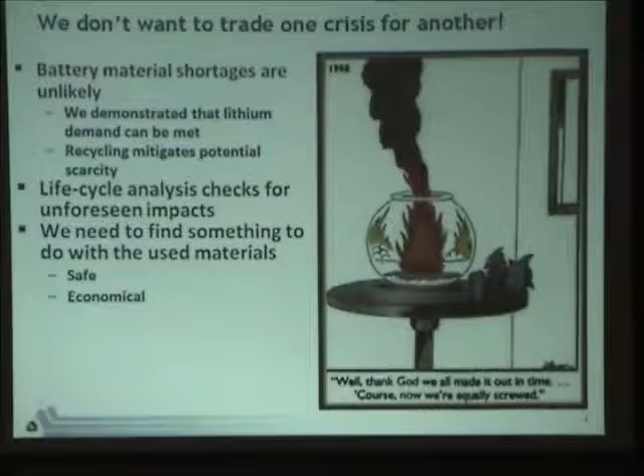That quickly led to the conclusion that recycling would help mitigate any potential shortages. We have also been doing life cycle analysis of the batteries to make sure that there weren't any significant environmental impacts that were going to crop up. And finally, we have been looking at the recycling technologies from the standpoint of making sure they're safe and environmentally sound, and also to see which ones are most economical, so that once we figure out what the technology is, some business would actually be willing to do it.

So to look at the material supply issues, we just answered a set of questions. How many vehicles are there likely to be? How many of them are likely to be electric? Are they likely to be plug-ins or pure electrics? How much lithium would that mean we needed each year? And how much difference would recycling make if you could get the material back? And then we wanted to see whether there were constraints on supplies of any of the materials.

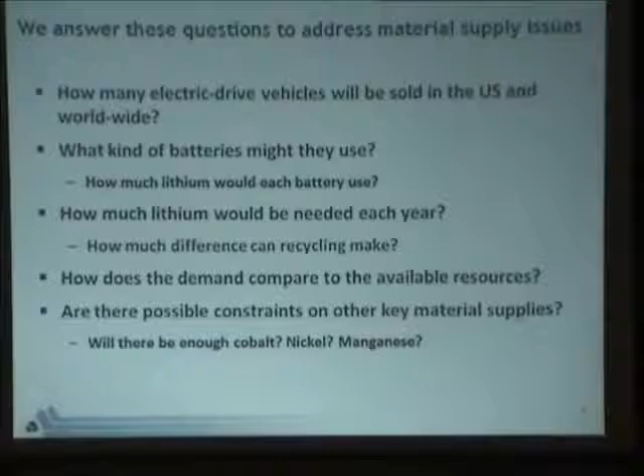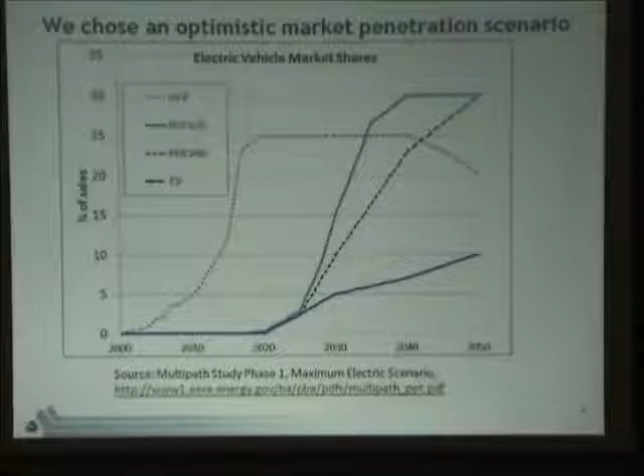I'm going to go through that extremely quickly because I know the focus is supposed to be on life cycle analysis for this. So we used a market penetration scenario for electric vehicles that was developed for the Department of Energy. This was their maximum electric scenario, and you can see that by 2050, approximately 90% of the vehicles would have some form of electric drive. And that's an extremely aggressive market penetration assumption. But keep in mind, it's a scenario and assumption.

There were also other scenarios. One was a maximum penetration of fuel cells. Another was a business as usual. So this is not necessarily meant to be realistic. It's how much lithium could we possibly imagine that we'd use.

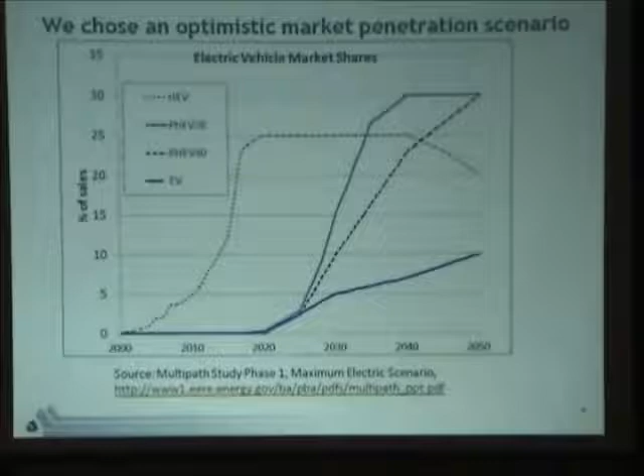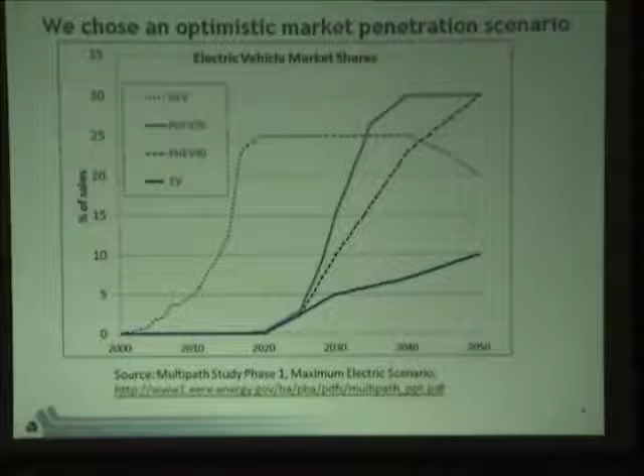What are those different? The dark blue one is plug-in hybrids with a 20-mile all-electric range. The dark dotted one is plug-in hybrids with a 40-mile all-electric range. So that would be equivalent to a Chevy Volt. The light dotted one is just straight hybrids, which are essentially assumed to plateau and then kind of dissipate. From the standpoint of lithium demand, they're the ones that wouldn't use much lithium anyway. And then the solid purple line is pure electrics.

So we actually, in collaboration with the Chemical Sciences and Engineering Division at Argonne, designed a set of batteries for these vehicles and looked at 4 different chemistries shown on this slide. They all have lithium in the cathode. The titanate also has lithium in the anode, and there's also some lithium in the electrolyte for all of them.

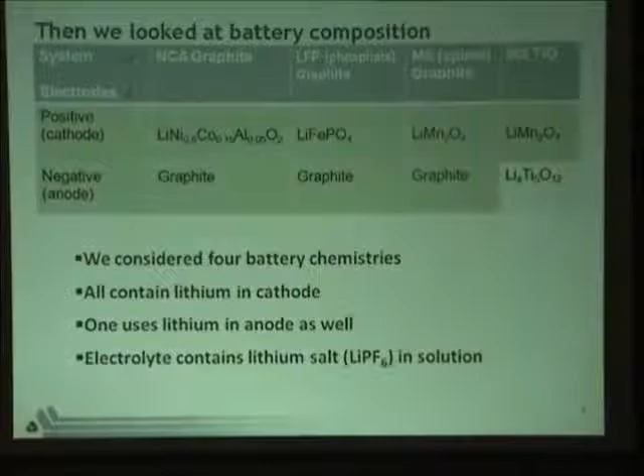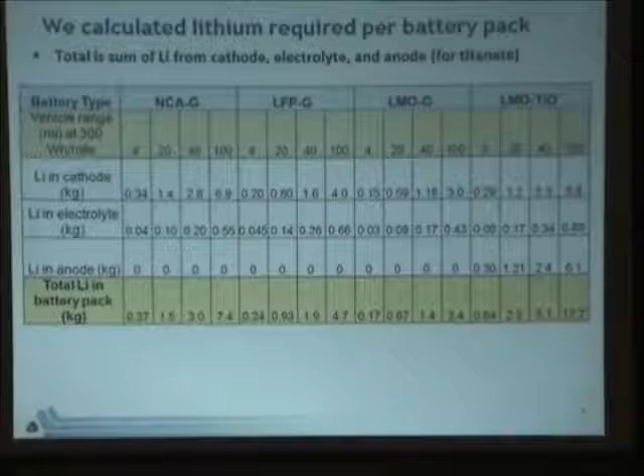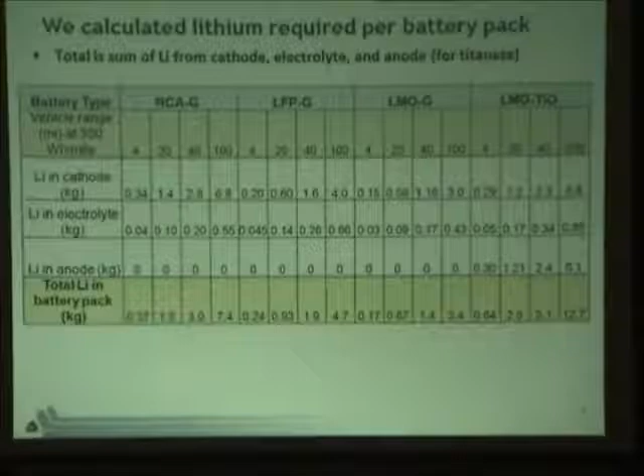But for that, it would be a 500-kilogram total mass battery, which is unlikely to be an acceptable alternative. So from that, I infer not that we won't use lithium titanate anodes, but that they won't be used for pure electrics. They would be used for vehicles with shorter ranges.

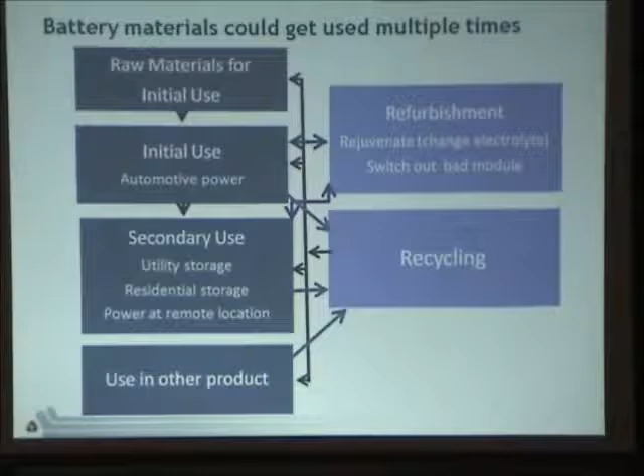I want to say a little bit about what you do with the material. Once you've used this vehicle, you've got a battery that's no longer suitable for use in the vehicle. It could be used for storage in a utility, and that's been discussed at great length by a lot of people. But even after that, when it's no longer suitable for the utility, the material is still going to be available for recycling, but it may be delayed 5 or 10 years. You can also think of various schemes for refurbishing the batteries, but in any case, eventually the material should be available for recycling.

You can see from this graph, which I'll explain in a sec, that if you can reuse the battery at the end of its life for the vehicle, that material becomes available 5 or 10 years later, and so it delays the availability for recycling of the material.

The top curve there is the total amount of lithium in tons that we could be using cumulatively over this period. What I've done in the curve that comes out brown on the screen is just lagged that curve 10 years, supposing you could get all this material back in 10 years, and that gives you the lower of the dotted curves, which is the net virgin material you would need if you used all the lithium needed but recycled it all after 10 years.

You can see that because the demand curve is actually turning over, the net demand actually peaks and then starts going down after that. The other dotted line, the higher one, is what happens if that material comes back 15 years later instead.

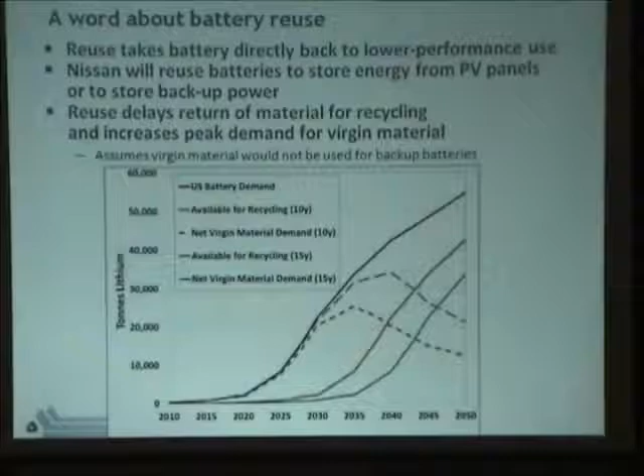That previous graph was U.S. demand for lithium, and what the lithium net demand would look like if you could recycle. We also did a similar thing for world demand.

We got a scenario from the International Energy Agency, which was extremely aggressive about EV penetration. In one of their scenarios, they assumed that all electricity was supplied with no CO2, which is optimistic at best, and also that there would be a net 80% reduction in CO2 from vehicles, essentially caused by electrification of vehicles. So, as you might imagine, they had very, very aggressive penetration of electric vehicles.

If you calculate lithium demand based on that scenario, you get the extremely high demand in the top dotted line. So that's the three graphs for maximum conceivable world demand.

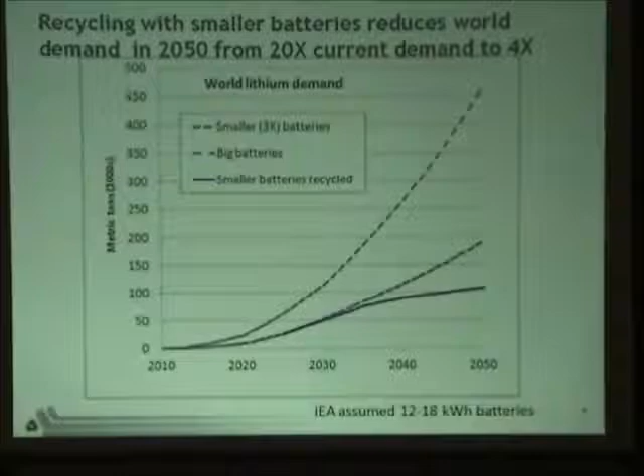If you then compare that under the three scenarios, the cumulative amount that would be demanded is about 6 million tons under the don't-bother-to-recycle-and-use-big-batteries scenario. That's still much smaller than even what the USGS calls their reserves, which is economically recoverable material.

And if you then assume that you can use smaller batteries and recycle them, you get way under even the most pessimistic current view of what world reserves are. So we're not going to run out of the material.

You could question whether current production capacity can keep up the pace, but I've got some backup slides, which I won't bother to show, that basically show current lithium production is something like 60% of world production capacity, and the major producers have enough spare capacity that they're building, which will take us out well past 2020. So in spite of the fact that there are lots of small companies rushing in to produce lithium, they're likely to go out of business before we need any of their product.

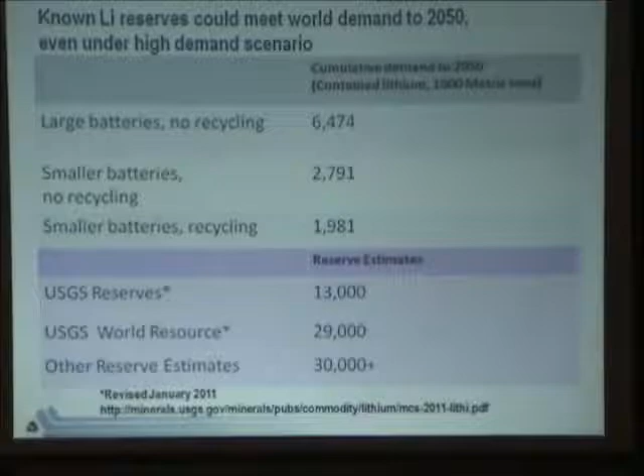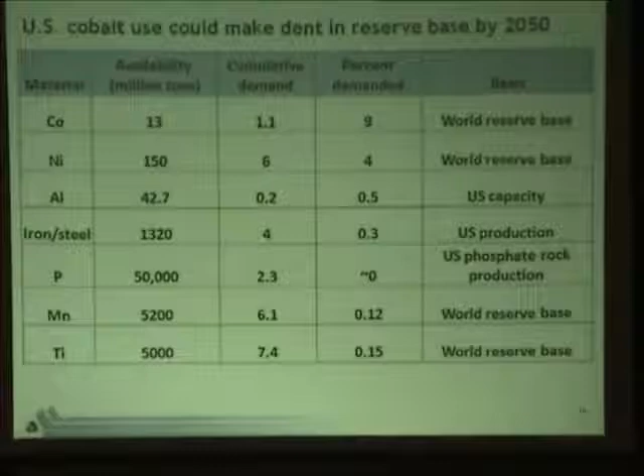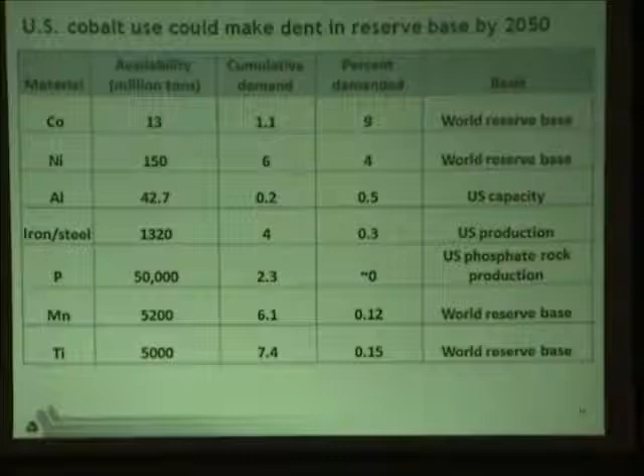On the other hand, if you look at cobalt and nickel—this is just potential U.S. use of these materials—if we kept using cobalt as the main cathode active material, we would be in danger of seriously straining world cobalt supplies. That's kind of reflected in the price of cobalt now, and it's one of the reasons why most battery manufacturers are moving to other chemistries.

So now it gets to the life cycle analysis. The bottom line is that we're not running out of lithium, but we could get short of other stuff.

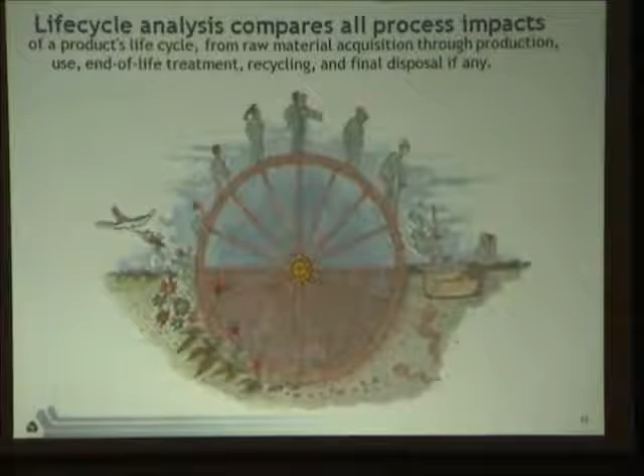So most of you presumably know what life cycle analysis is. I stole this graph from somebody in Europe who apparently had stolen it from somebody else, so I have no idea what the original source is. But it gives you the idea that you're starting from the material in the ground and looking at all of the things that happen to this material over the course of its life until you're done with it entirely. And you want to know all of the energy inputs, all of the material inputs, and all of the things that come out as well, whether they're emissions or useful products or co-products.

And this is my sort of little LCA soapbox. There's a lot of effort in Europe in particular to come out with a single number at the end of a life cycle analysis. So there's one computer company that, when they're purchasing products for their offices, gives them a single ranking. And so you want to buy a product that has a ranking of 5 instead of a product that has a ranking of 4. But this is a summation of a whole set of unrelated factors, and I don't believe that there's really any appropriate and correct way to weight them.

I actually tried to do this myself a long time ago and figured out that it was extremely difficult and risky. In particular, if you're just talking about the impacts, it's difficult enough, because do you really want to compare health effects of miners in one country to eutrophication of lakes somewhere else, to environmental impacts in some other place, and how do you add those up and how do you weight them?

But more than that, if you start looking at a time dependence and start thinking about intergenerational effects, it's a huge bag of worms, because you don't necessarily want to discount future health effects. You don't want to leave dangerous things lying around for your great-grandchildren. But on the other hand, if you give those significant weight, then maybe you're short-shrifting impacts that are happening now. So I don't really think there's any good way to do it, and I tend to leave impacts separated by impact categories.

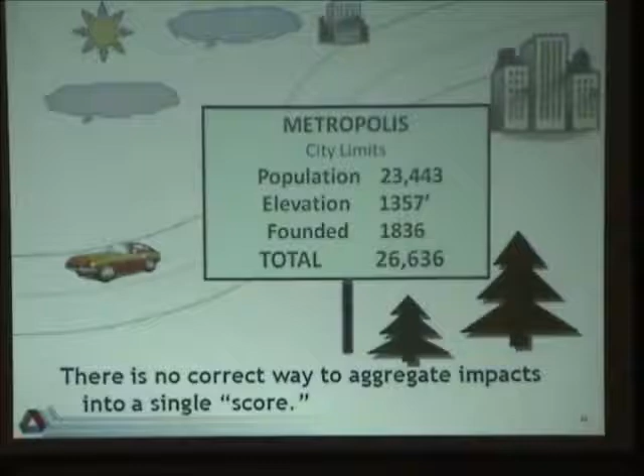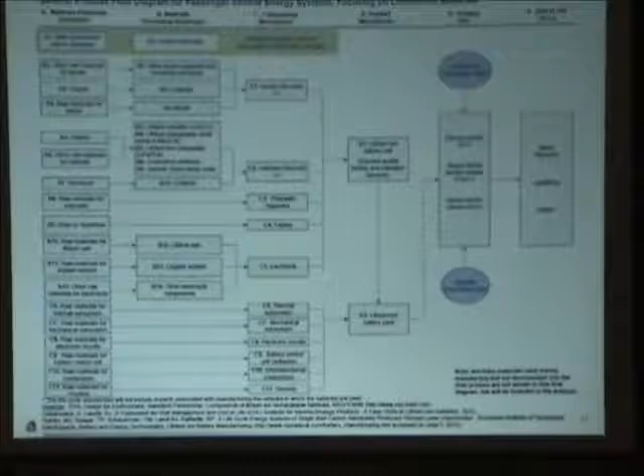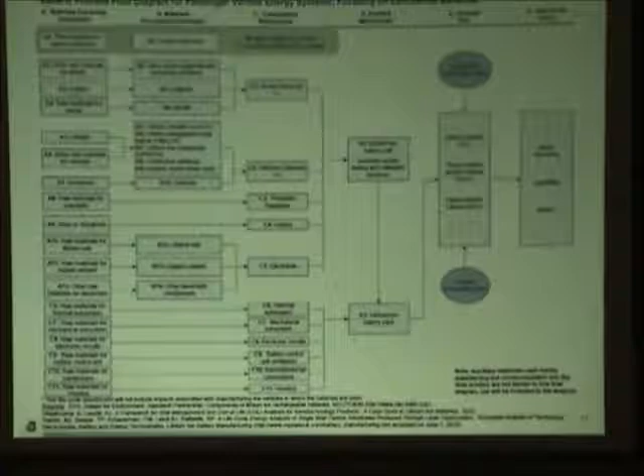Okay, this is a sort of generic battery production flow chart that was put together by the EPA, actually, or for the EPA. There's a life cycle analysis of EV batteries that's being done by the EPA because it's possible that some of the anode materials will be nanomaterials. They'll be carbon nanotubes. And so they're doing an entire battery life cycle analysis, including the life cycle of the vehicle, in order to understand whether the nanoparticles are going to matter.

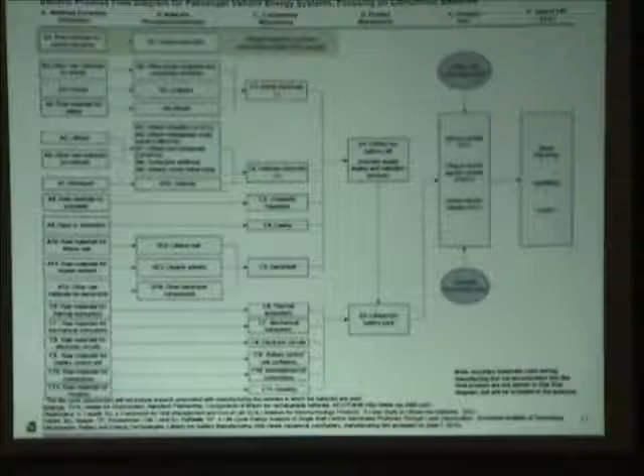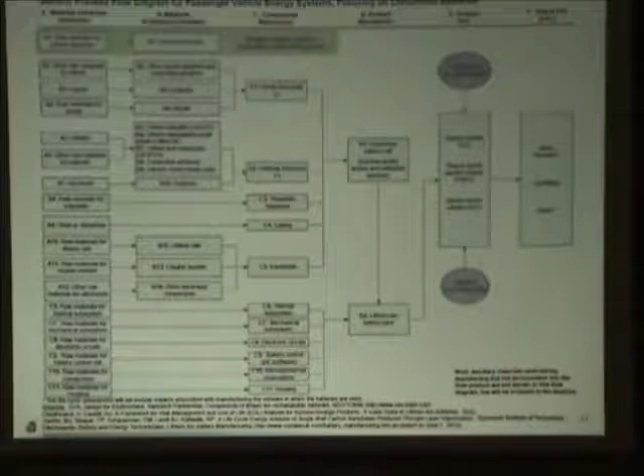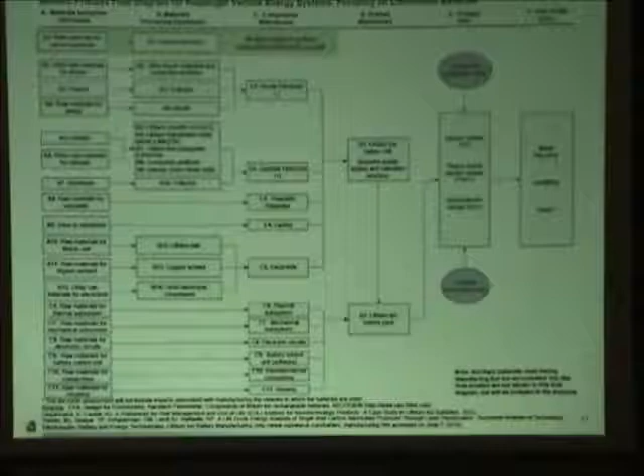And my personal opinion was that they should have just looked at the nanoparticles, but we were happy to see them look at everything else too, because it was kind of a freebie that we could see what they came up with. But you'll notice that there's not much on the back end. It gets to metal recovery, but not really much else, and the material doesn't feed back in.

So when we were looking at battery life cycle analysis, the first thing we noticed was we didn't have to look at everything. You don't have to start from scratch if you already know about aluminum and copper and steel, and these make up a significant fraction of the mass of a battery. So those are materials that we already know about, and they're already in the big database that we use, which is part of the GREET model.

And I assume that somebody's talked about that a little bit already. But it's Greenhouse gases, Regulated Emissions, and Energy use in Transportation, or something like that model. What it is essentially is a very large two-part spreadsheet. GREET 1 has to do with the fuel cycle, so it's digging out the coal and beneficiating it and transporting it to a power plant and burning it and looking at the emissions. It goes from fuels in the ground to when you would use them in your vehicle. And the other part of it is GREET 2, which is the vehicle cycle, and that has to do with producing the vehicles that will use those fuels.

And obviously, if you're looking at the battery production and then recycling, it's part of the vehicle cycle. So we have been using those materials that are already in there and trying to get information in some detail about the battery-specific materials. And the thing that's really interesting, or challenging, is that in some cases there is a small number of companies that are producing them, and in many cases the information is proprietary. And so we've had to be imaginative in some cases in estimating what the energy use is for these things.

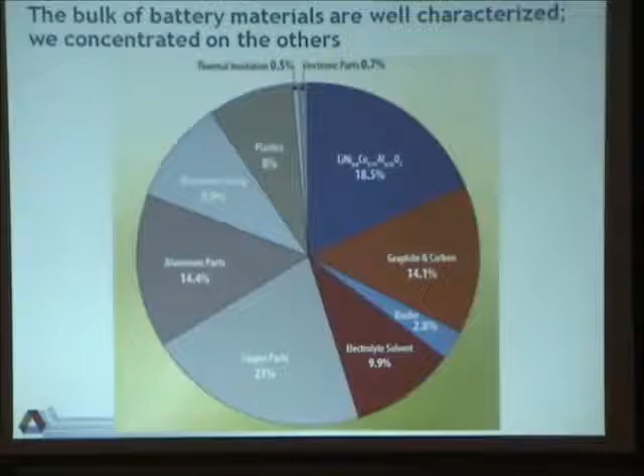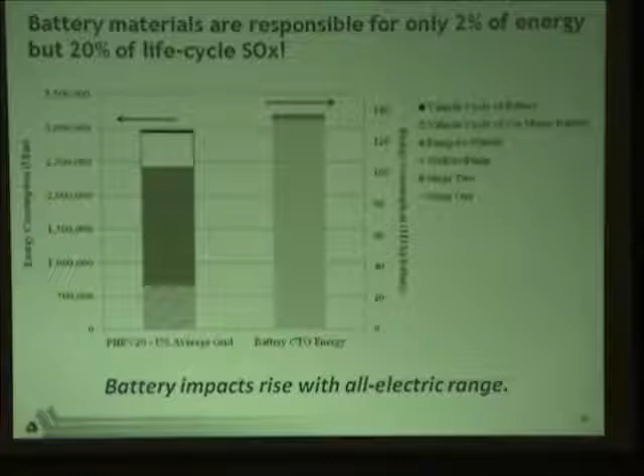So we've shown that reducing the life cycle energy use for the vehicle, and by the same token CO2, is not the major reason for recycling the vehicle and the battery. But we have shown that you can alleviate potential materials scarcities by recycling. It's possible that the recycled materials will be cheaper, although not necessarily, and you do reduce any impacts that you had from the production.

What turns out to be the real stick here is that in many places, especially in Europe, and I believe there are some regulations in California coming as well, battery recycling is required. So that means that even if it doesn't pay and even if it doesn't save you a lot of energy, you've got to do it.

So what should you do? Well, you can recycle materials to all different parts of a production process. You can take it all the way back and pretend it's like an ore and start from scratch, or you can, if you're really lucky, take the pieces out and reuse them in a battery.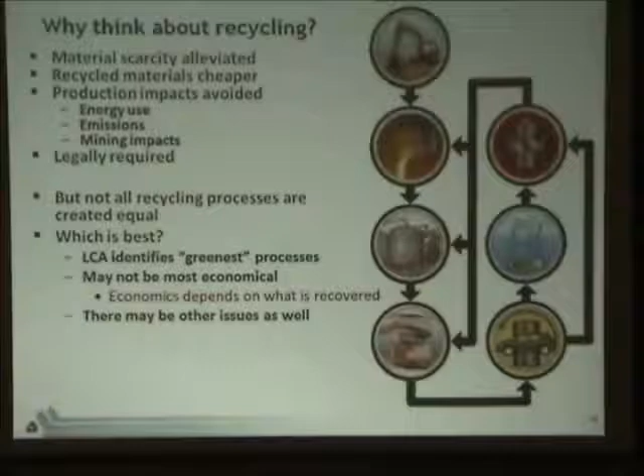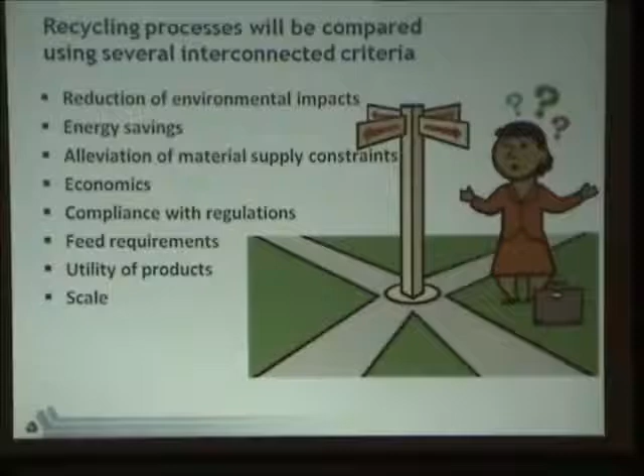So we've been comparing battery recycling processes to figure out which ones are the best. Criteria we're thinking about are energy use and emissions, which ones actually get back the most materials that could be in tight supply, what the economics look like, which is really important, and whether the processes are allowed by regulations. For instance, some of the processes may not satisfy all the requirements of the European battery take-back laws. Other various factors come into it as well, as you'll see.

Here's a quick slide I've made recently with approximate numbers, giving you an idea of why it matters which cathode material you're using. Some of the cathode materials are listed on the left, and you can see that the constituent elements, if you've got cobalt in the cathode, are pretty valuable. In fact, the constituent elements aren't worth a whole lot less than the cathode material itself. So you don't much care how you get it back, as long as you get the cobalt back, and nickel as well. But if you've got a newer chemistry, like lithium iron phosphate, the constituent materials are pretty much worthless. So if you want any economic incentive for this recycling process, you hope you can get cathode material back, or maybe something else valuable, which we haven't quite figured out yet.

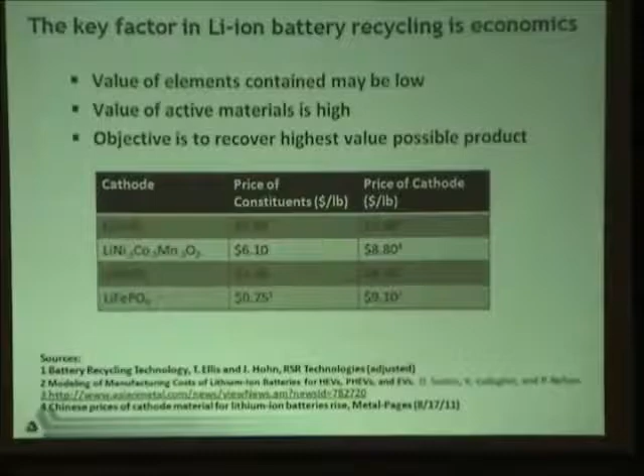And in Europe, because you do have to bring the batteries back, the previous slide was just talking about the cell materials, but the entire battery pack has a lot of other stuff on it as well. It's got electronics, electrical conductors, and a big housing. Those materials may actually help the economics, because those are materials you've got to bring back anyway, and they will have some value as well.

So now I'm going to go through quickly the three types of battery recycling processes that are actually in advanced enough stages of development so that we can characterize them at all.

The one that's commercial on a large scale, and the plant I visited is in Belgium, is just smelting. That means you've got a big furnace running at high temperature, and you take the entire battery, you don't even have to chop it up, throw it in, and the organics are burned. The carbon in the anode acts as a reductant. You get nickel and cobalt and manganese out the bottom, and the lithium goes to the slag, as does the aluminum. That slag right now is used as an additive for cement manufacture. The people running these processes will tell you at great length how much it improves the property of the cement, but it's still a pretty low value product to be getting out.

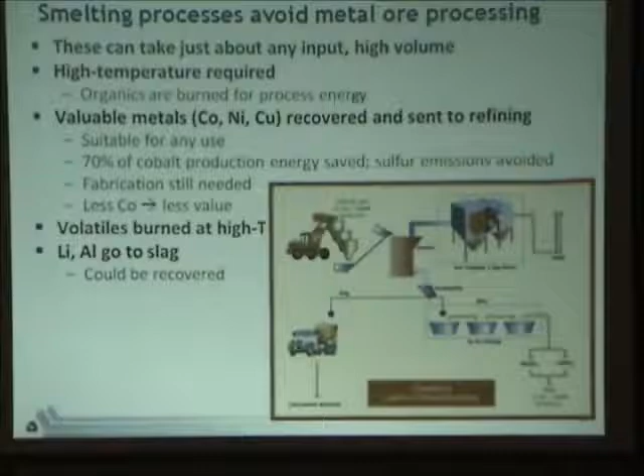Okay, this is a flow chart we've made of this particular smelting process in Belgium. Note that lithium-ion and nickel metal hydride batteries are going in. This is for their existing plant. They've just opened a new smelter at the same location, and they're going to be running batches of one battery type at a time there. So instead of getting a mixed cobalt nickel product out, we'll be getting just a nickel product out from the nickel metal hydride.

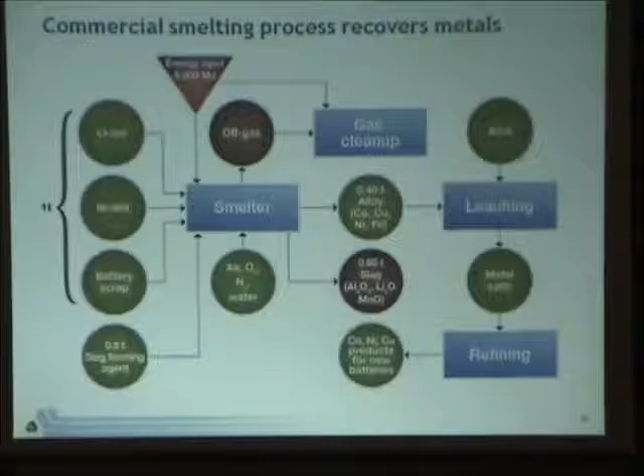And that will reduce the energy for the refining, which is actually not shown on this. So we're going to need to add that when we do the LCA, because the LCA is going to compare virgin battery material production and finished battery production to production using recycled materials, to see what the actual benefits are.

None of the slides show that the battery terminals need to be taped, and in fact they don't seem to bother so much in Europe. That's a real concern, and that's why I mentioned the storage, because you'd want them stored either in sand or, as they do in Trail, British Columbia, in berms or bunkers, so that if there's any potential problem - if you're storing a large number of spent batteries, you might have a fire sometime - so yeah, that's why I'm concerned about this particular plant.

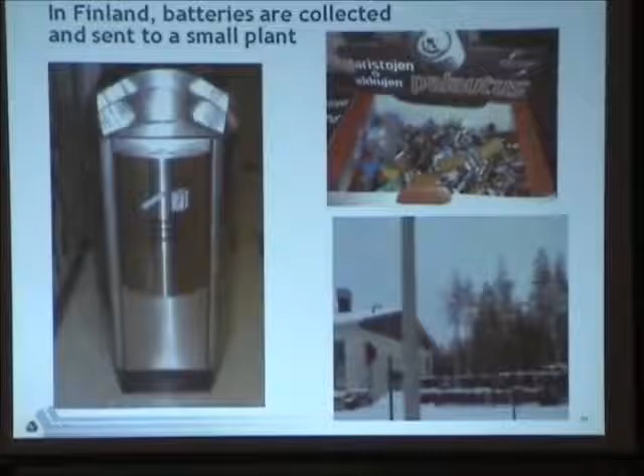At that plant, what they do is sort the batteries essentially by hand, and the lower left picture shows some lithium-ion batteries they've gotten in. Then they chop them up, basically with no other treatment, and they get large quantities of this black flake material that's essentially everything that was inside the battery and the casing as well. They're sending that material to a cobalt recovery plant in Kokkola, Finland, where they leach the cobalt and the copper out.

And again, the lithium is lost, but it's not much lithium because the plant's primary feedstock is material from that big tailings pile in the Congo. So the lithium-ion battery material is only a very small part of that plant's input, so it's not much lithium on a percentage basis of their whole feed.

So they haul those tailings from the Congo to Finland? Yeah. Yeah.

Yeah, they put them on big ships of some sort. And Kokkola is a coastal city, so they don't have to ship it overland at all. But yeah, I thought that was pretty cool.

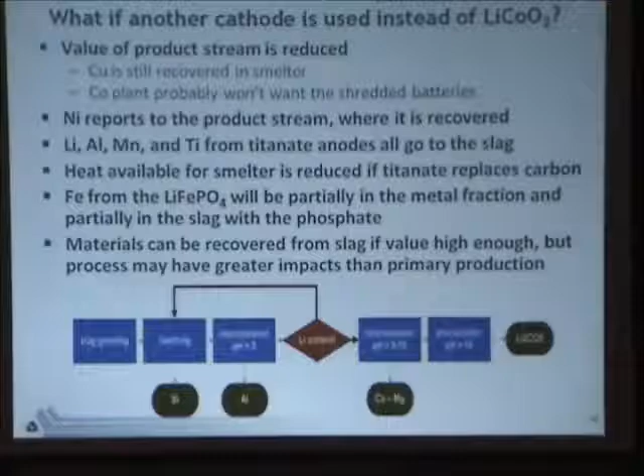Now, we've been nudging the smelters about possibly recovering materials from their slag, and so they've come up with that flow chart on the bottom to show that they could, in fact, be recovering lithium carbonate. They're thinking about doing it, but they notice, rightly so, that it's a more complicated and energy-intensive process than just getting the lithium out of brine in the first place. So they're not currently doing that.

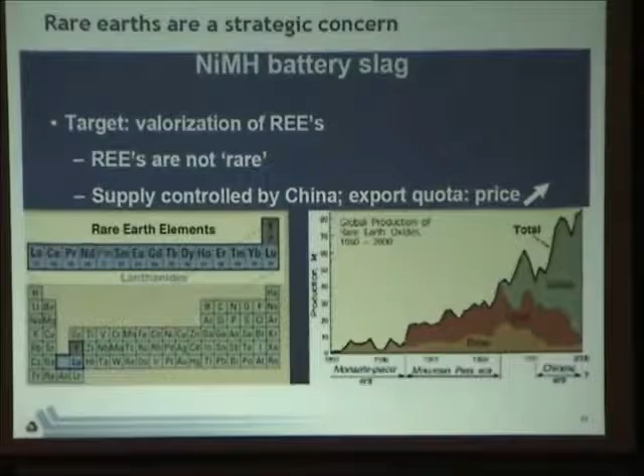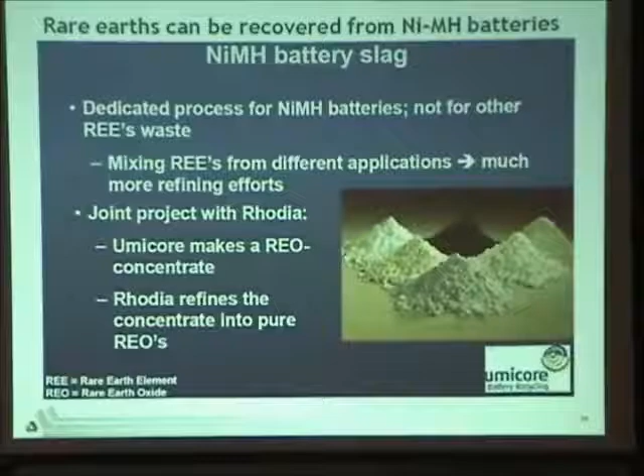On the other hand, if you have nickel metal hydride batteries as your feedstock, this is a little aside, because the market for rare earths is getting tight—the Chinese are thinking about restricting their exports to the U.S. and other places—there's actually much more interest in recovering the rare earths from the slag. In particular, Umicore, the company in Belgium, has a deal with a company called Rhodia, which is now recovering the rare earths from the nickel metal hydride battery slag.

Now, the next kind of process is a little bit more elegant. It's a lower temperature process, basically hydrometallurgical. So you don't need as much energy to do this, and you can actually get more materials out than just the basic metals.

The Department of Energy awarded a company called Toxco about $10 million under stimulus money to build this plant in Ohio, which is currently under construction. At that plant, they will start by recovering both nickel and metal hydrides from nickel metal hydride batteries, but they hope to be actually recovering cathode material—though they're not quite sure how yet.

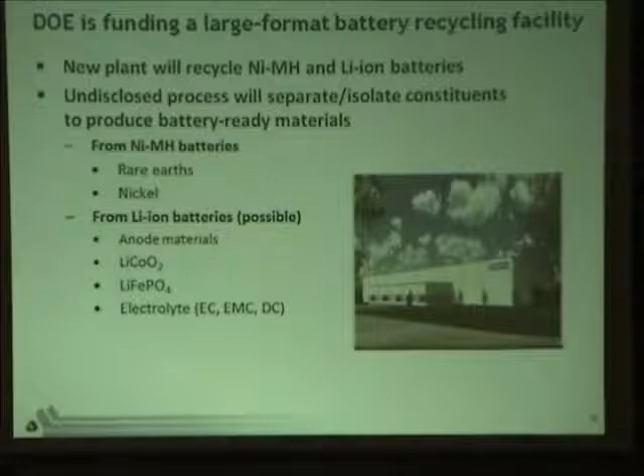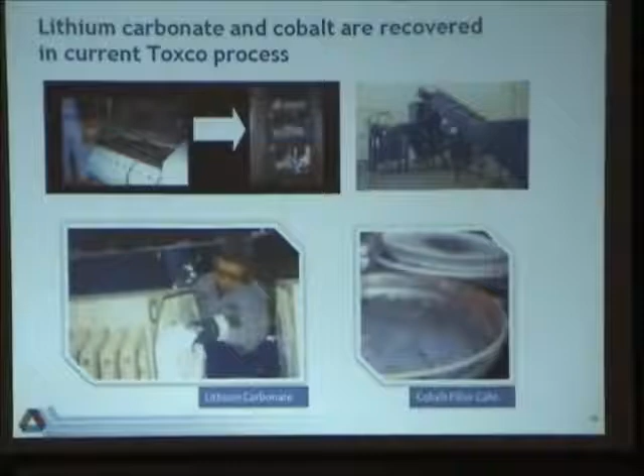But again, what if you use a different cathode material? I can't really answer that yet. I have some chemists thinking about it, and in fact, the people at Toxco aren't quite sure what they're going to do yet. They hope they'll be able to get cathode material, but they're going to start just by recovering the metal hydrides and the nickel from the nickel metal hydride batteries, because that's really what the major stream coming back now has in it. So this one still has some work to be done.

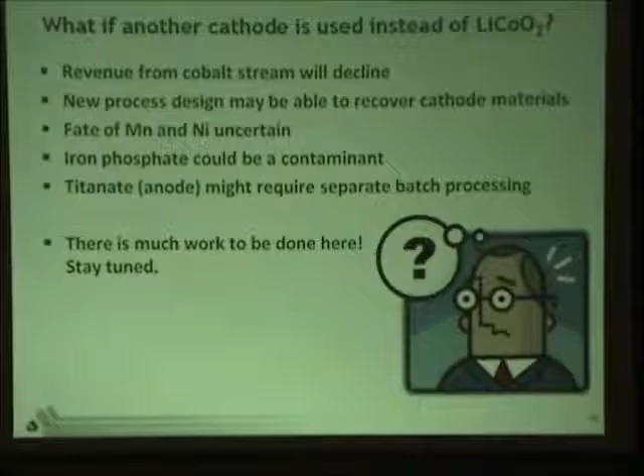And then we get to the last type of process, which I would call just physical processes. This is not a commercial process yet—it's been demonstrated basically on a bench scale. What the company that has done this has done is taken batteries and crushed them enough so that the casing was breached, then used supercritical CO2 to extract the electrolyte, including the salts in it.

That material can, in fact, be recovered and reused. They then take the rest of the material, chop it up, and use a series of physical processes, including froth flotation and gravity separation, to separate cathode material and anode material and the aluminum and the copper from the substrates. The aluminum and the copper can get sent to secondary metal processing, and they have actually demonstrated that they can

make new lithium-ion batteries with the materials that they recover. The cathode material may need to have some additional lithium added to relithiate it, but they do in fact get batteries with apparently good processes, good properties. Again, this is a low energy process, and it has a big advantage in that it can be run on small scale, so that if you were Dow or A123 and had your manufacturing plant and had manufacturing scrap coming out the back, you could put in a process like this and actually recycle your own waste materials.

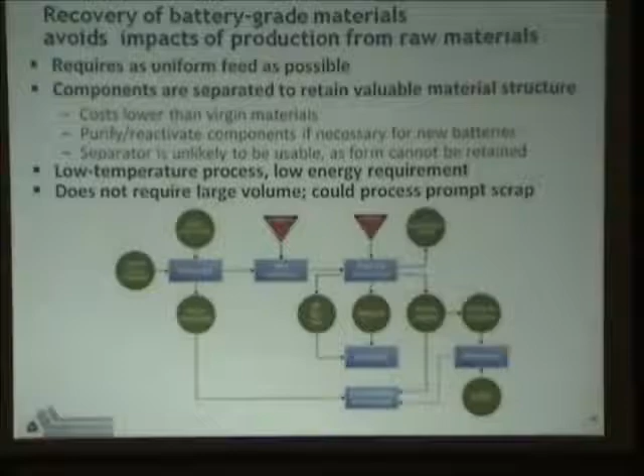The other potential problem with this is this material is not coming back for 10 or 15 years. I don't know that in 10 or 15 years batteries will be using the same cathode materials that they're using now. Is the material that comes back going to be a dinosaur? Is it going to be saleable? Is there some other valuable material that you could get out? And that's one of the questions that we're actually asking right now.

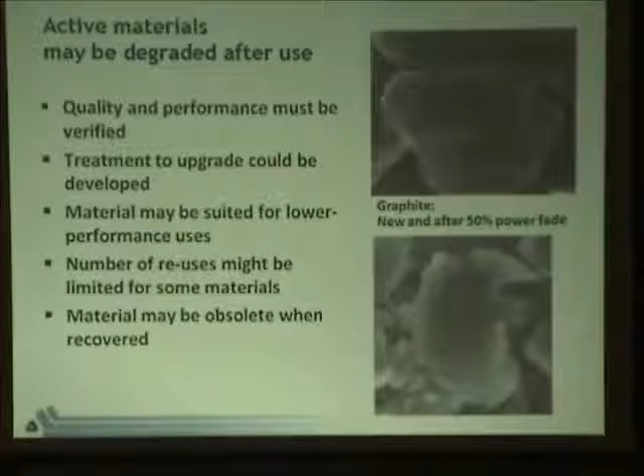But if you can reuse cathode material and anode material, you can displace just about all of the pieces of the battery with recycled materials, with the exception of the separator, which is a thin plastic layer that goes between the electrodes, and it's polyethylene or polypropylene that's been stretched in such a way that it's got very specific porosity properties. And when you would recover it from a process like this, you'd get small pieces, and it would be suitable for reuse as a polyethylene pellet, but would have lost its great extra value for that it had because of its thin form.

Again, what happens if you use some other cathode? And in this case, I don't think it's a problem at all. They have in fact gotten some funding to do the same thing with manganese spinel cathodes, and they've also demonstrated the same process with nickel metal hydride batteries. So except for the fact that you want to have a separated stream, I think this process would work for just about any battery chemistry you put into it. You might have to use a different set of solvents or liquids in your gravity separation or whatever, but the basic idea should be the same.

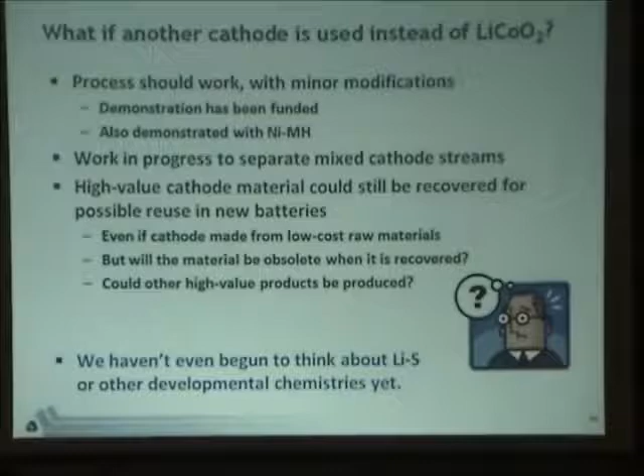If we get to other battery chemistries like lithium-air, I have no clue. It's so far down the line that people haven't even made the batteries, so I don't know how people will recycle those. So this slide actually summarizes the differences of the battery recycling processes.

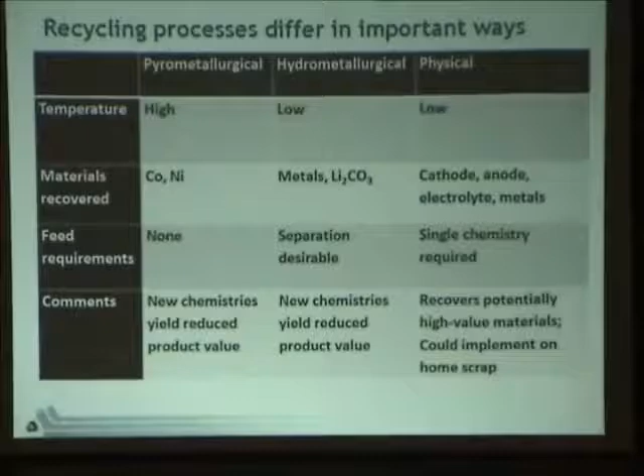And the key points are that if you smelt it, you're not going to get much out of any value if you've got one of the non-cobalt containing chemistries. And on the other hand, the physical processes would require a fairly pure input, and there is some question about whether the product will be valuable when it's coming back in 10 or 15 years.

And so finally, I just want to mention one thing. I mentioned that the separator is likely not to be recoverable per se, but you can get the plastic back, and there's somebody at Argonne who's actually demonstrated a process where he can take used plastic bags, and presumably he could do the same for battery separators, and make them into carbon nanotubes. So that would be an example of upcycling, where you take some waste product and make it into something that's more valuable than the material you had to begin with. So I think that's kind of cool.

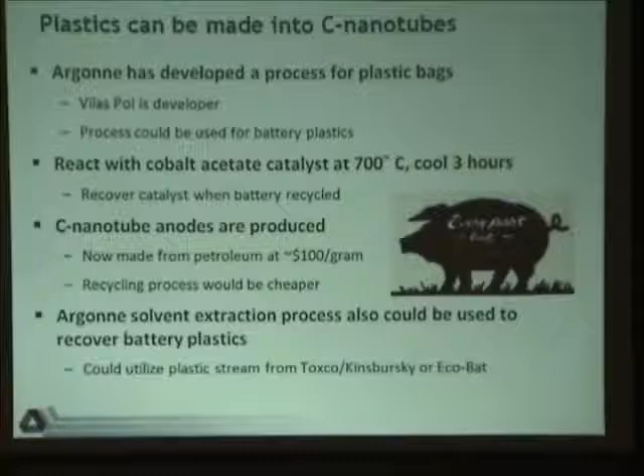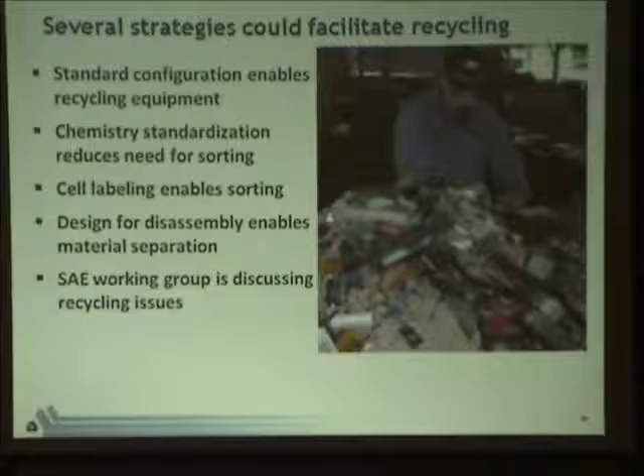And the very last thing is that almost any of these recycling strategies would benefit from a set of logistics improvements. If you could standardize the materials, you wouldn't have to worry about separating them. If all of the batteries were the same size and shape, you could design a machine to take them apart for you. And lacking that, at least if you can label them, you know which is which, and you know which process to send them to, or you can separate them for batch processing. I'm actually a member of an SAE working group looking at recycling issues, and we've got a draft document about labeling of batteries, which if anybody's interested, you're welcome to review.

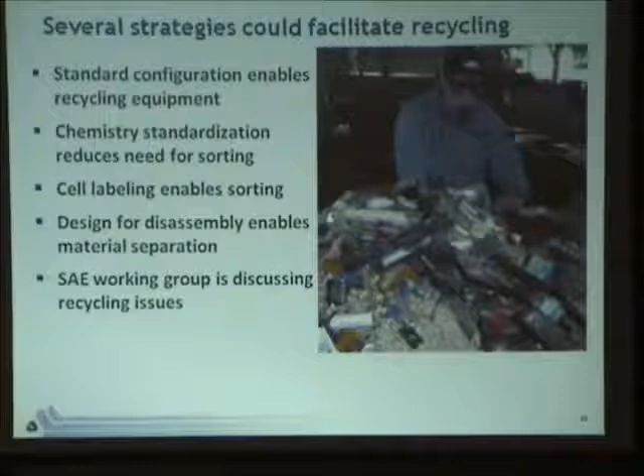And with that, I will say thank you. That's a picture of a Volt battery, actually, and you can see that it's not just the cells.

So does anybody have any questions? Yeah, where is most of the lithium?

Right now, most of it comes from salars, which are salt lakes in Chile. Argentina also has a lot. Bolivia has the largest reserve in the world, but they haven't managed to exploit it yet for technical and political reasons, I think. The U.S. also has some lithium, and we used to produce our own before they figured out they could get it really cheap from the salars in South America. There's also some salars in China, and China is producing its own lithium. There's also some lithium in Finland, and some in Afghanistan, which I thought was rather amusing when that news came out. I just can't imagine we would go into some big economic venture in Afghanistan at this point. And then it's even sillier than that, because the Japanese are thinking about getting lithium out of seawater, and I don't think they're going to need to do that for quite a while.

Any other questions? I have a couple of questions. One is, isn't lithium also used for medicines? Mm-hmm, in very small quantities, but yes.

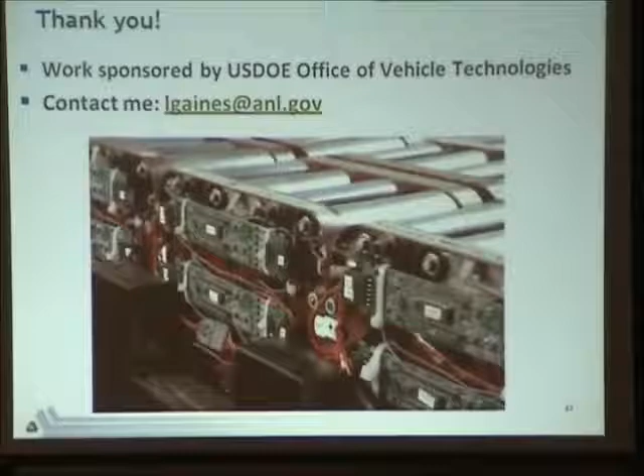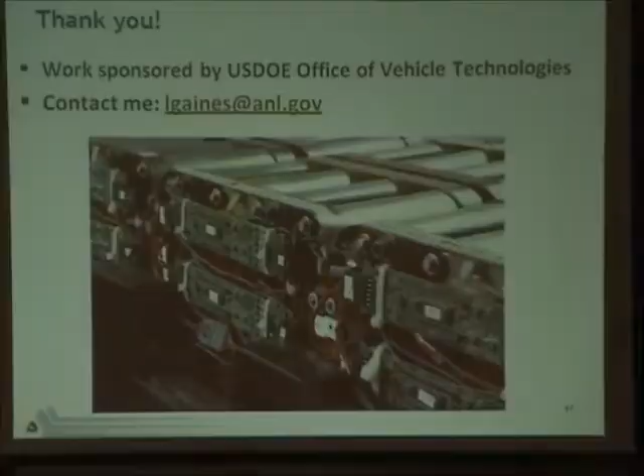It depends. Suppose you've got a crystal that's the optimum size for battery performance, and because of previous use, the crystal has split into smaller pieces. I'm not sure how you get it back to being big again. Well, you got it there in the first place, so you must be able to get it back.

Yeah, in the direct recycling process, they actually relithiate it—they put in some more lithium, but they treat it at a lower temperature than was needed to make the battery in the first place. So the idea that you've got to split the molecules apart seems less elegant to me. If you can reuse it the way you made it, in valuable form, there's something very attractive about that.

But you do have to ask whether, when you get it back, anybody's going to want it. If you're talking about electronics batteries, they come back in 2 or 3 years, so the chemistry is likely still to be used. But if you've got an automotive battery used in a car for 10 years, then used to store grid power for 5 or 10 more years, you're talking 15 or 20 years from now. Do you think the same cathode materials are going to be used?

I don't know. It suggests you should have batteries designed with replaceable components. So you just drive in and get a new set of plates, like filling your gas tank. Then those plates get recycled, so the turnaround time is a month, not 10 years.